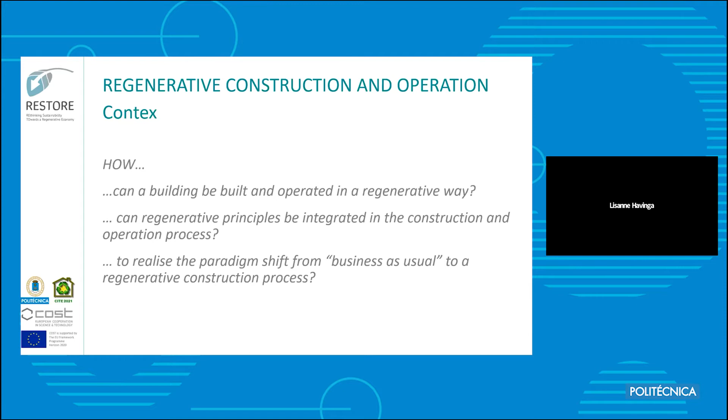The context and basis of our investigation was the question of how a building can be built and operated in a regenerative way. Not only how it is developed, but how it is really realized. This was connected with the question of how regenerative principles can be integrated into the construction and operation process. So the overall question is how it's possible to make a shift from business as usual to a regenerative construction process.

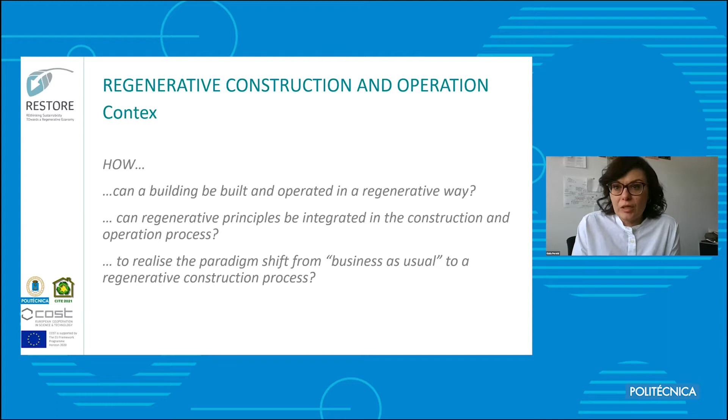To deal with these questions, we investigated from the point of view of the life cycle of the building, starting with procurement. Everything that happens before, so the design and planning, was investigated by working groups 1 and 2, presented by Blair and Lisanne. So it started with the procurement, considering everything which happens before the start of construction - this means bidding, tendering, procurement, and so on.

Then the second part was construction - what happens in preparation of the building site, on the building site, which kind of materials, typologies, technologies, and so on. Then a very important point was the operation and maintenance of the building - how can this be done in a regenerative and sustainable way?

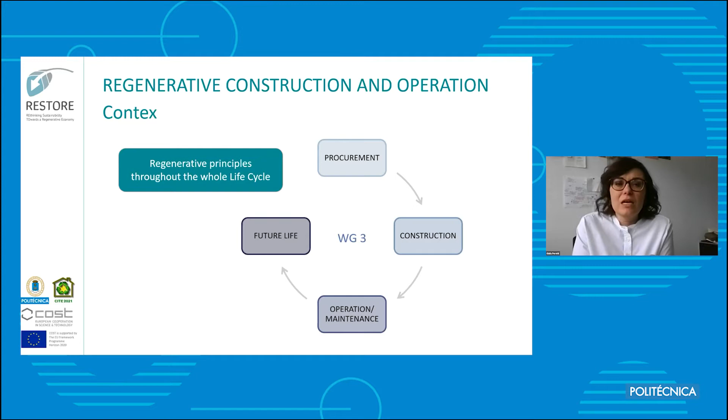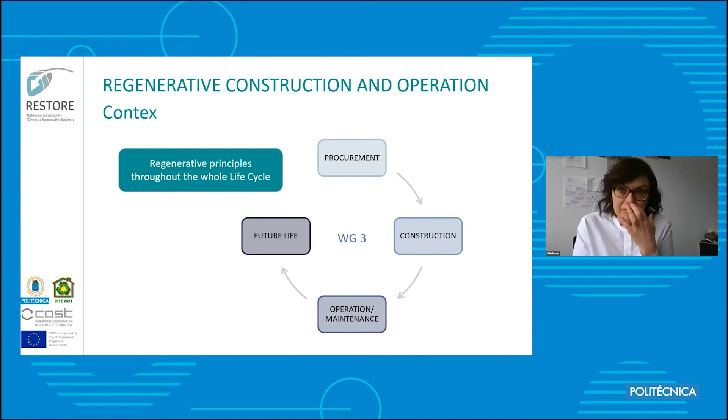And last but not least - the last point, but also the beginning of the circle - is what happens after the final life stage of the building. Is the building dead, or does it start a second or future life? So we investigated the regenerative construction and operation process from the point of view of these 4 life stages of the process.

At the beginning, we investigated 3 major challenges in the transformation of the construction sector and real estate industry. This regards their regeneration from the point of view of construction strategies, facility management, and everything related to existing buildings, both historical and heritage buildings, but also normal buildings. Regarding construction strategies, our main challenge was how we can shift from degenerative construction strategies to a positive environmental impact of the construction sector.

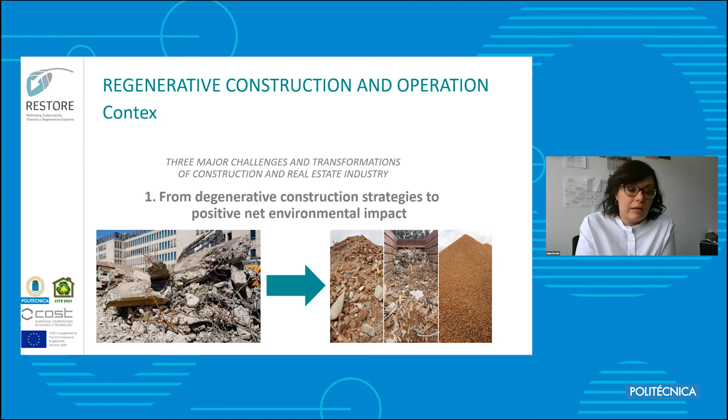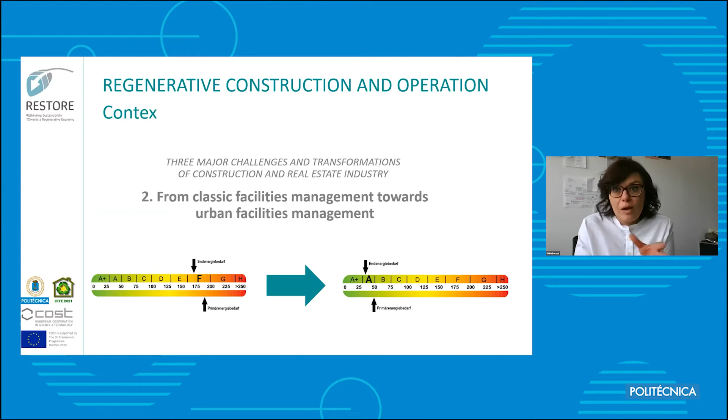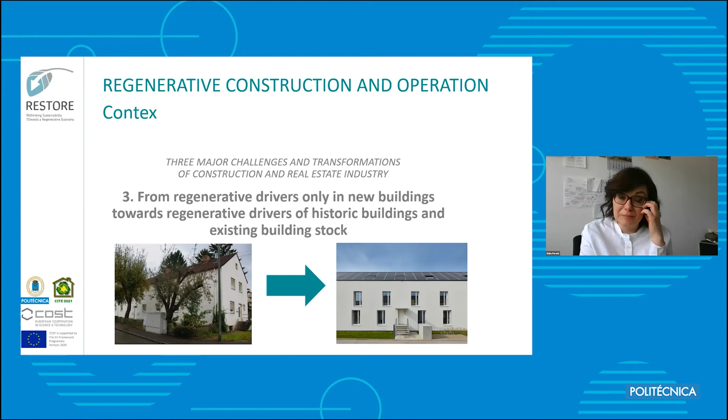The second challenge regards the operation of the building, and how it's possible to move from classical facility management, focused on one singular building, towards regenerative and larger urban facility management. The third point is related to existing buildings, and how they can also be a driver for regenerative development, because the number of existing buildings and existing building stock is much higher than the number of new buildings.

So starting from these 3 questions, we investigated them from the point of view of the 4 stages I mentioned before. Regarding regenerative construction, 3 more main steps emerged which are drivers for a positive environmental impact in the construction sector: the use of sustainable and regenerative materials, the implementation of innovative and regenerative technologies, and all these will help to shift from less-bad strategies into a positive impact on the environment.

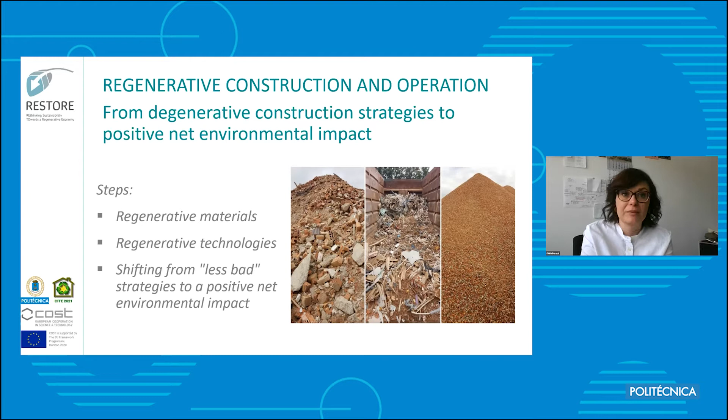The Restore contribution was split into two stages: the first, bidding and procurement, and the second, the construction stage itself. Procurement is crucial for regenerative building because it makes the transition between the regenerative design vision and reality.

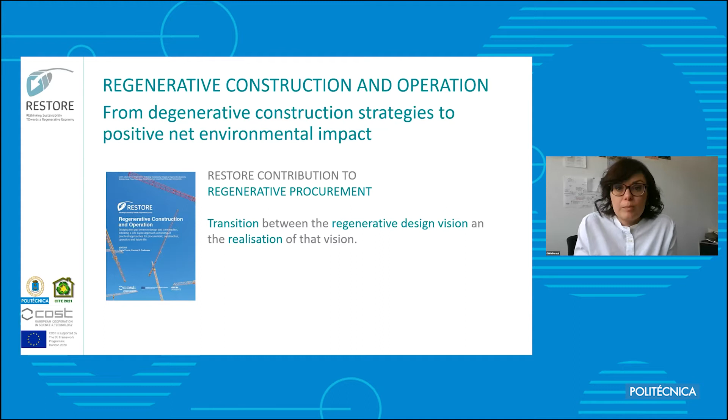The aspects analyzed for sustainable procurement were examined in the working group, with one main focus on instruments and tools for regenerative procurement. In particular, we investigated the PQQ - pre-qualification questionnaires - which are tools to raise awareness and force change throughout the supply chain. This is a very useful instrument for the client, allowing a sustainability understanding from the potential construction supply chain. So we developed a template which can be used in more or less every construction process.

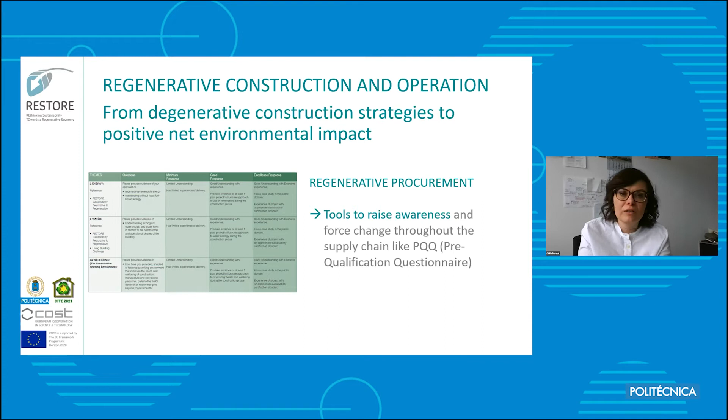And this gives the possibility to investigate at the beginning how sustainable, potentially sustainable, or regenerative are all the actors involved in the construction process.

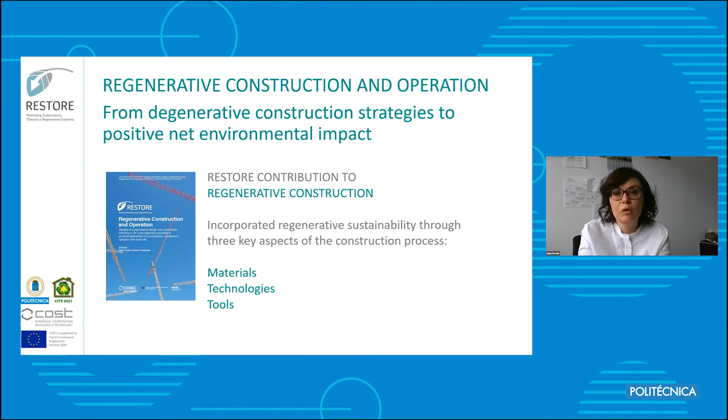Then we move to the second field investigated, namely the construction process. This was really important to understand how we can shift to regenerative and positive environmental impact. So the key aspects are the materials used, the technologies used in construction, and all the tools which support the construction process, like norms and certifications.

The three fields have been investigated through a survey, and the results were very interesting. They helped in the identification of the barriers, but also the challenges and opportunities for a wider use of emerging materials and technology in the construction sector. Furthermore, the improvement of knowledge was identified as a key aspect for the shift toward a regenerative and sustainable construction process. In our report, we have a large analysis of all the results of this survey and which country has which technologies more diffused.

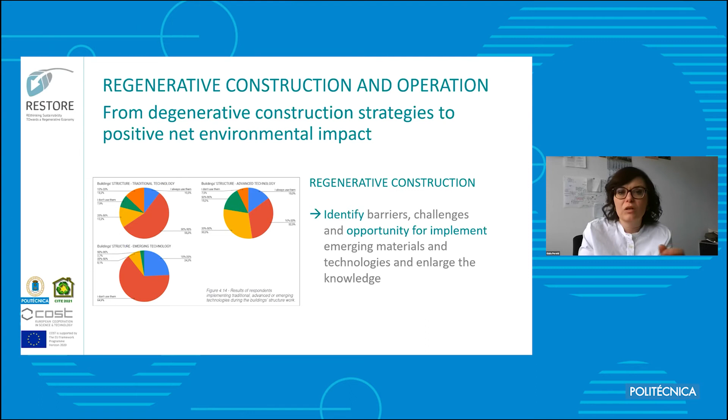Then, trying to answer the question related to sustainable facility management, we investigated what sustainable facility management means. The three steps and topics we identified are: first, the integration of facility management during planning and construction, meaning integration at an early design stage.

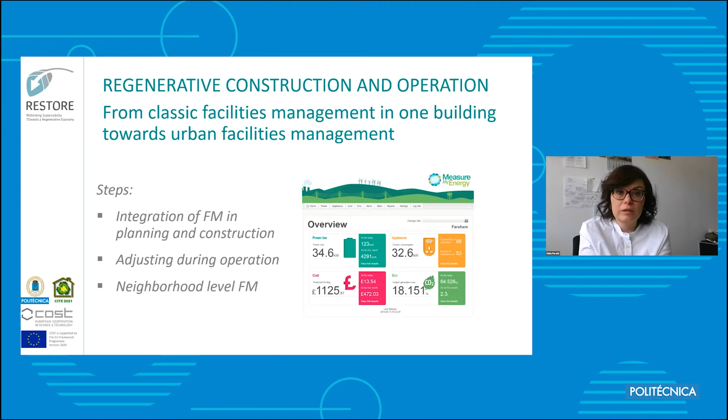Then the second point is related to the settings of the building services, so the adjustment during the operation of the building. And the third one is the shift from the classical view in facility management, focusing on an individual building, to the neighborhood level or the level of the entire city.

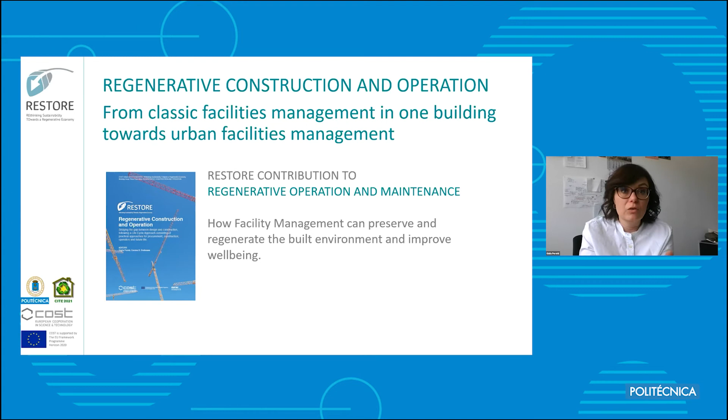In the work of the working group, these topics have been especially investigated from the point of view of the environment and the user's health. The contribution of Restore was in the definition of new targets for facility management in order to make this change possible. So the goal is continuous optimization to maximize the benefits both for the environment and the users, and at the same time assure that the initial state is maintained or enhanced.

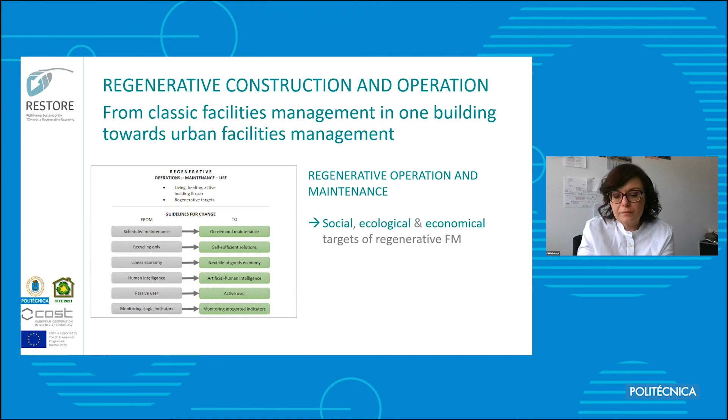This is possible, for example, by moving from traditional scheduled maintenance toward on-demand maintenance, or through monitoring integrated indicators instead of single indicators, and from thinking in a linear economy way towards a circular economy one. The topics of circular economy were also one of the main aspects investigated in the future life theme.

This tries to respond to the challenge about regenerative drivers also for historic and existing buildings. The idea is the thinking that a building has a future life after the completion of its traditional life.

Within this framework, we identified two main steps. The first is the adaptation of existing buildings to avoid potential negative impacts. The second is the rethinking of the concept of existing building and waste, thinking of buildings as a resource and urban mine for new buildings.

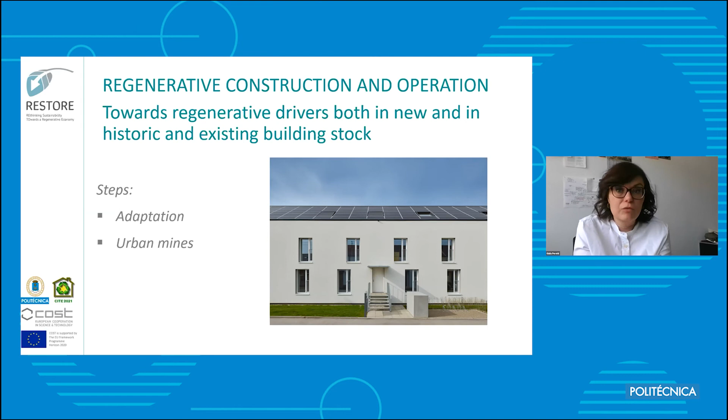In the work of Restore, in this working group, we investigated the concept of circular economy, adaptability, and flexibility, all focusing on the concept and potential of waste.

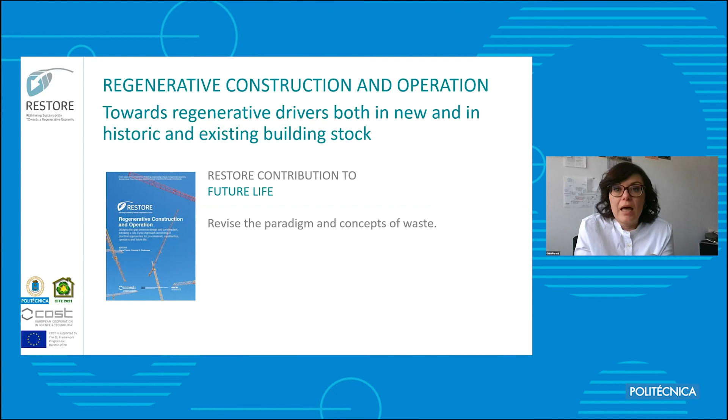Indeed, the concept that building users use a building until it is worn out and no longer usable was an important point we investigated. We evaluated regenerative initiatives like, for example, cradle to cradle or building as a material bank.

Especially, one of the outcomes of the working group within this future life topic was the development of a roadmap for the implementation of circular economy thinking, which, as you can see in this graphic, starts from the change of mentality and understanding of the concept of waste, up to education, and then we move to the process we mentioned at the beginning.

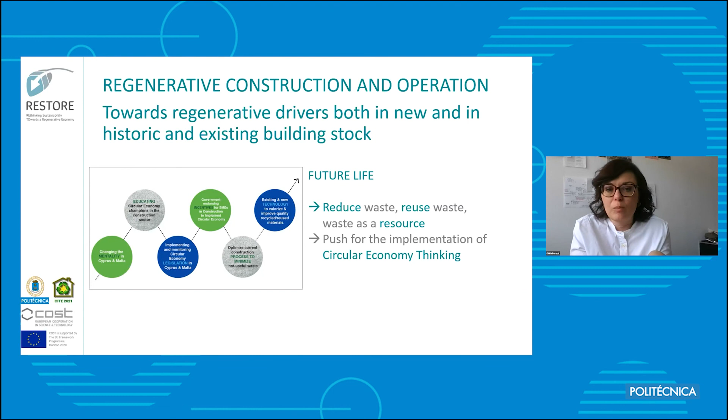So the loop is closed with procurement, construction, and operation. With this idea, we tried to set the basis for the implementation of circular economy thinking in the construction process from a practical point of view.

And this was also the last topic of working group 3. I hope I could give you a brief overview of what we've done in our working group.